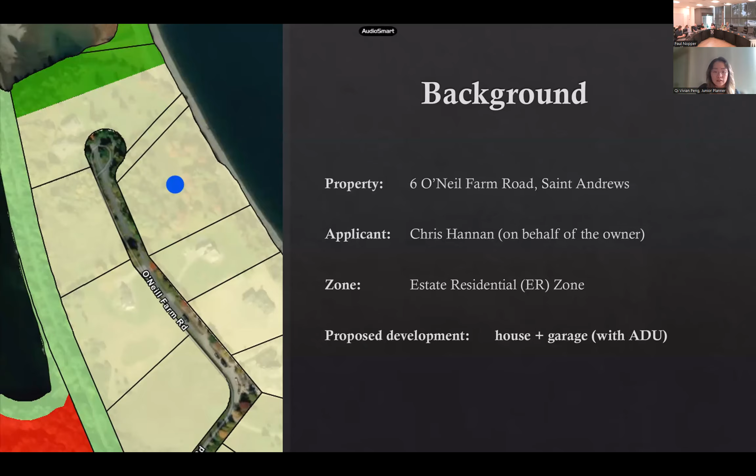So the garage requires two variances. One is a location variance to allow the garage to be placed 12 feet closer to the front property line, which is the road, than the house. This is because the zoning bylaw usually doesn't allow accessory structures to be located closer to the front property line than the main structure, and that's why this proposed location requires a variance.

And the second request for the garage is a size variance. Like I just said, the garage contains a garage space and an accessory dwelling unit space. So to accommodate both allowed uses, both functions, the garage needs to be slightly bigger. So the size variance is 393.8 square feet to allow the garage to be 1,298 square feet in gross floor area.

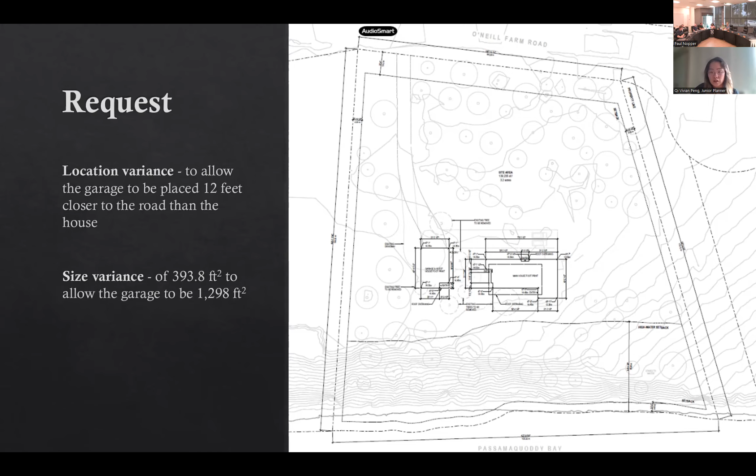The first request is under section 2.8 of the municipal plan policy regarding housing, which essentially says that accessory dwelling units should be encouraged. The second policy is under section 2.4, general land use and development, which says council shall recognize the special character of St. Andrews as being worthy of attention and enhancement. Council shall implement policy guidelines on adjacent uses, and number two, continuity of streetscapes with respect to the use, scale, and design of buildings and other structures, which is a relevant policy to the two variance requests tonight.

For consultation, Town Public Works provided comments regarding stormwater management, water and sewer hookup, and post-construction road repair. You will find the exact comments in the planning report. Those conditions have been communicated to the applicant as conditions of the building permit approval for the house, and they will also be conditions for the building permit approval for the garage once PAC has made a decision tonight. There's also a mail-out to residents living within 100 meters of this subject property, and if we have received any comments, we can share them with PAC after the presentation tonight.

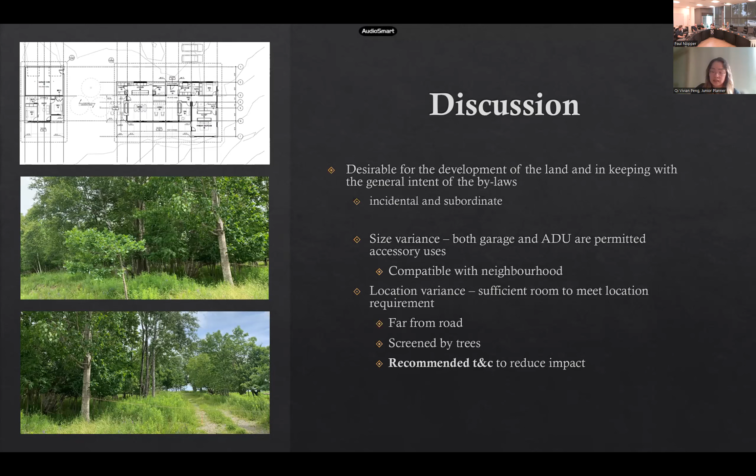So here is what PAC should discuss: weigh the pros and cons of all the factors, and make a decision on this variance request. But as stated, staff believes there is good reason to approve it. Staff is recommending PAC approve this location variance with terms and conditions to make sure the garage is compatible, the impact of the location variance is minimized, and to allow a desirable development of this property.

So staff recommends that the Planning Advisory Committee of the Town of St. Andrews approve a variance in gross floor area to allow the garage to be 1,298 square feet. And staff recommends PAC of the Town of St. Andrews approve a variance to allow the garage to be located 12 feet closer to the front lot line than the house, subject to the following terms and conditions.

Number one, the applicant shall maintain a landscaped buffer in the required front yard of this property, except the portion used for driveway access. Landscaped buffer and required front yard are defined terms, and PAC is provided with the exact definitions in the report. The second recommendation is that applicants shall ensure that all stormwater runoff would not affect neighboring properties, which is to address the town's public works comments.

So to reiterate, under the Community Planning Act, PAC has the authority to approve staff's recommendations as presented, or PAC can approve the request with modifications, or PAC can overturn the recommendations, basically refusing the variance request. All right, that's the end of my presentation.

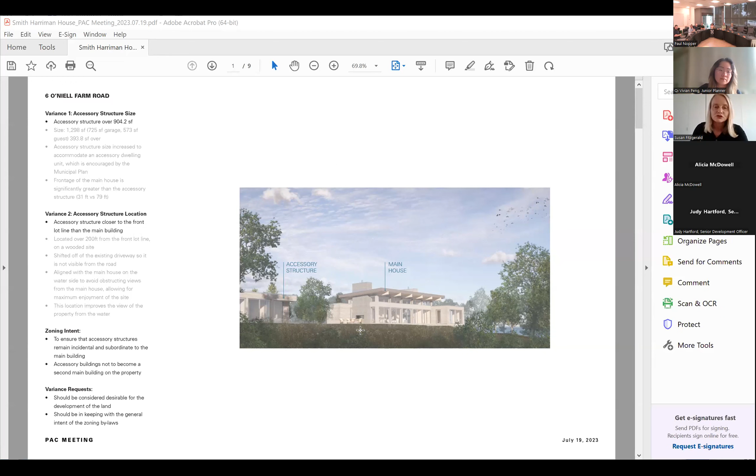This perhaps shows it a little bit more clearly. When you look down the driveway, this is the relationship: you see straight out to the ocean, and off to the side of the driveway is the garage, so it does not in any way impact the view. The garage is in line with the house, and the back of the garage accessory building is 12 feet behind the line of the house.

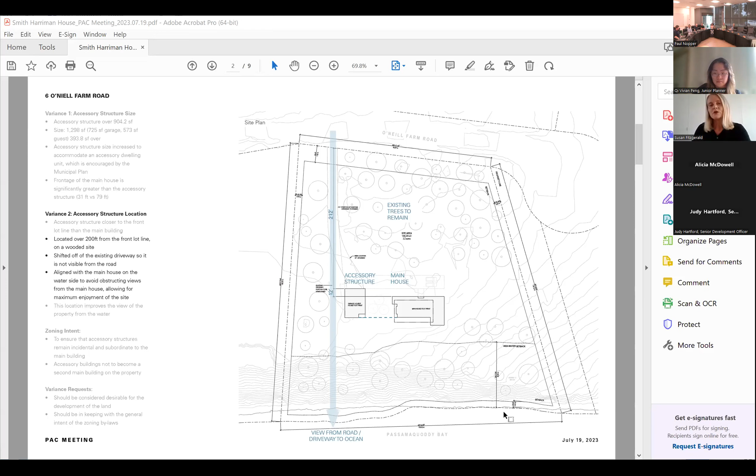So these two align, and at the back it just very slightly projects towards the rear property line. I think what's very important about this property is that it's actually seen more from the beach, and so having them in line makes a great deal of sense, both from the ability of the owner to see the ocean, and also as people walk along the beach, it will feel more subservient to the house. So the accessory building feels more subservient.

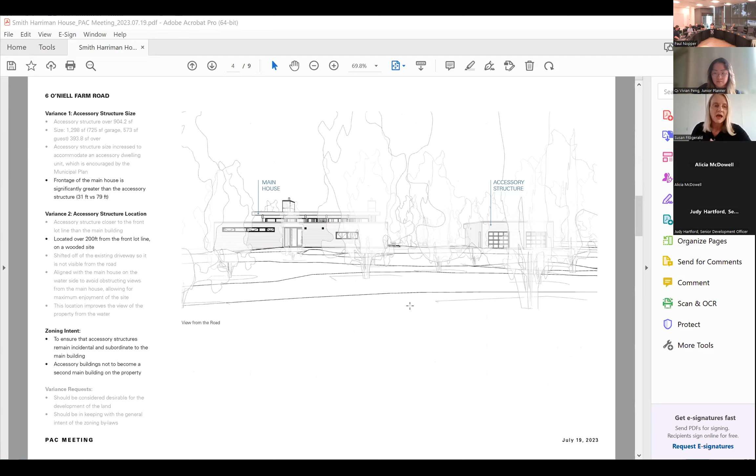You don't see it from the road, and it's more subservient from the ocean. So here we see the two again, the accessory dwelling and the garage, and then the house. And just to see it in a three-dimensional view, if you were to stand in the middle of the trees, you would see the two side by side, but the accessory structure is very much smaller, lower. There would be no recognizing it as the primary house structure.

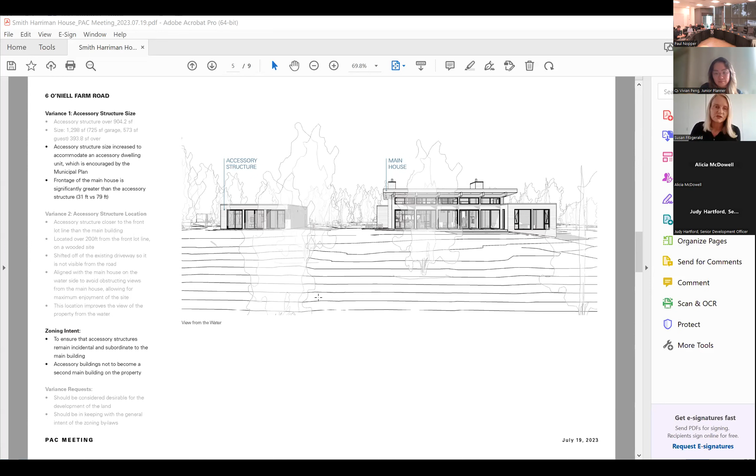And here we see it from the other side, from the water side, and we see again it's a much smaller building than the house. So it will never feel like it's trying to be the house, or it won't be mistaken for being the house. I don't think it will impact the views, I don't think it will impact anybody's experience of the site from either the road or from the ocean.

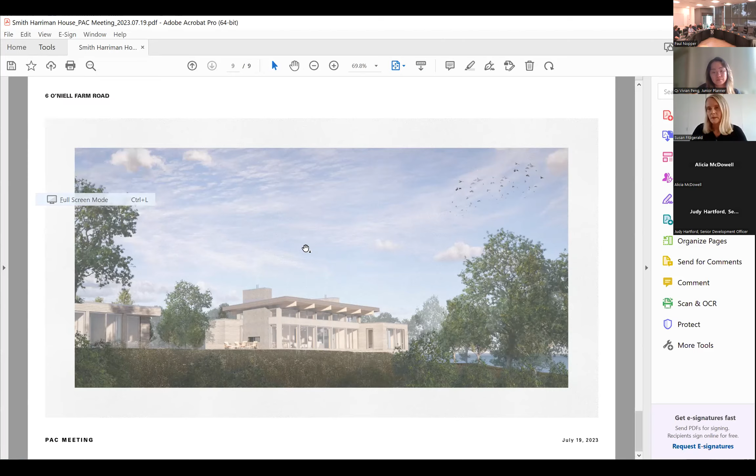Thank you. Well, when it comes back to us, we have two variances being requested, so we'll deal with these in two separate motions. The recommendations are at the bottom of this planning report.

So I would be having discussion. I guess we can just move forward if someone wants to make a motion with regards to the variance of 393.8 square feet. I'd like to make a motion for 6 O'Neill Farm Road, PID 15157-134, that we approve a variance of 393.8 square feet in gross floor area to allow a garage to be 1,298 square feet. Thank you very much.

Madam Chair, I'm just curious, there's actually two items on that, there's the variance. Oh, you wanted to - oh, sorry, my apologies. Yeah, I'm doing them separate. Sorry. Okay, nope, so just so I know I'm tracking. No, thank you.

Is there any discussion about that motion, the seconded motion? If there is none, if you're ready for the question, all those in favor of approving a variance of 393.8 square feet gross floor area to allow a garage to be 1,298 square feet, please signify by saying aye. Aye. None opposed, that variance is approved.